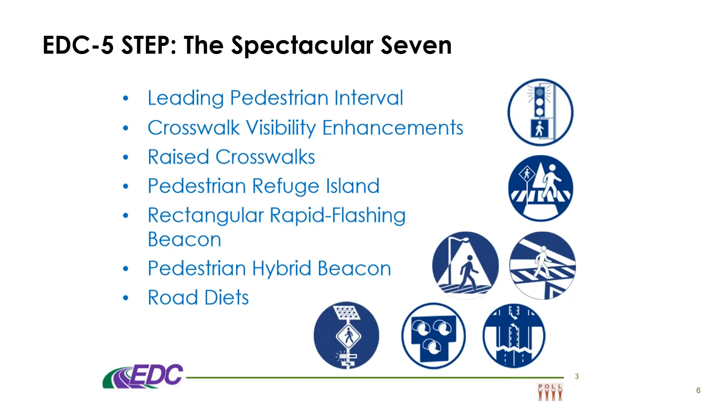The STEP guidance that I'll send you a link to shortly sends you through a step-by-step process that you can use to collect data, inventory your locations, look at crash types, select countermeasures, and deploy them and monitor their outcomes over time. It's really a good step-by-step process for any agency that's interested in improving safety at crossings, but doesn't really know where to start.

And at the core of STEP is a really helpful countermeasure selection tool that uses factors like roadway configuration, traffic volumes, and speeds to help agencies understand what are the countermeasures that we would recommend and expect to see used at these types of locations. So I'd encourage you to take a look at the STEP tables that are within the guidance that I'll link to in just a second.

I think the valuable connection here is that agencies can figure out how best to use the STEP guidance to figure out countermeasures, but what we're going to talk about today is a little bit more about how you can think about proactively looking for locations that may not have had a crash history, but may be at risk of crashes happening in the future, using these same countermeasures to address them and improve safety there.

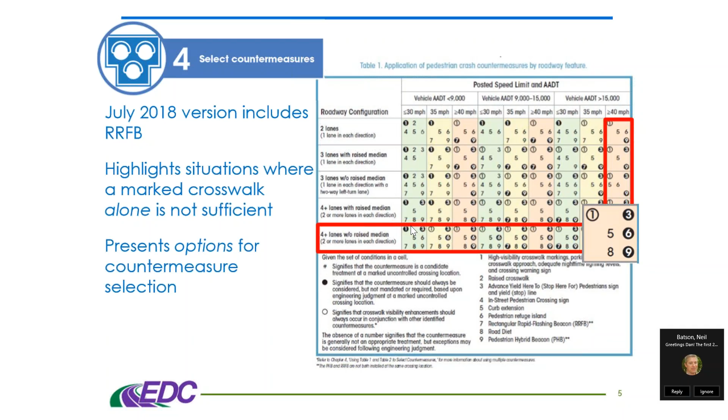Thanks, Dan. Hi, everybody. Thanks so much for being with us today to talk about this really exciting aspect of transportation safety analysis and planning: systemic safety. So I want to start today just by giving a very brief overview of systemic safety, and then we'll turn it over to the other panelists to really talk about systemic safety in practice. I'm going to pull today from a couple of major resources, and then at the end of the presentation, I'll have a listing of other resources for you.

But this is a definition of systemic safety from NCHRP 17-73. That's the guidebook on systemic pedestrian safety analysis; it's not recently released, it's about to come out. I definitely encourage you to look at that. It's an excellent resource, and I'm really excited to have some material from that today.

And then also I'll be talking a lot about FHWA's systemic project selection tool today. So systemic safety is an approach to identify high-risk roadway features correlated with specific or severe crash types. It is data-driven, really letting the data drive you to what you prioritize and what you identify as risk factors so that we can start to address the problems network-wide.

And that's a key part of this, right: it's different from site analysis in the sense that we're not just looking at specific locations as we have in the past, as we do in hotspot analysis, but we're really looking throughout the network with the idea that we want to start to address problems when they're babies, right, when they're not big problems, or hopefully before problems even occur. And to do that, we need to look throughout the network to really try to understand where the problems might occur.

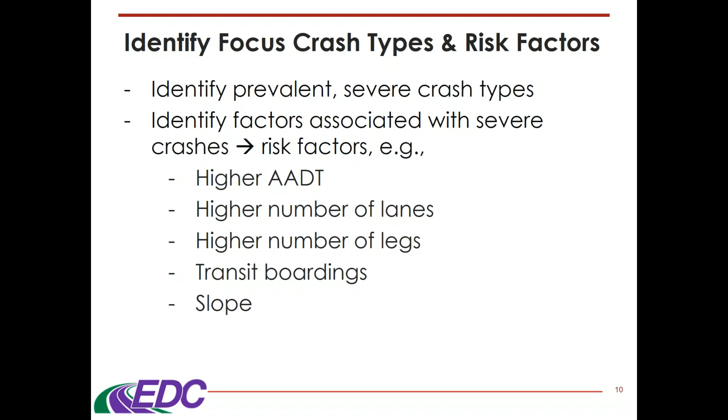So we're looking for risk factors associated with those, such as higher AADT, higher numbers of lanes and legs, places where there's a lot of activity. Transit boardings, for example, would indicate that. Also, slope can be an indicator. So I'll talk a little bit more about these things, but we're trying to understand factors we need to be prioritizing. So we need data to do that, right?

There's a recommended minimum data. There are additional data that we would recommend you collect, but we need to understand when we're looking at this, where in the system are these crashes occurring? Are we looking at the state roads? Are we looking at local roads? What are our crash types? And this is really important, again, for selecting the focus crash type.

So for pedestrians and bicyclists, oftentimes we're going to need to derive those using multiple variables from the crash data. So for example, we're looking at the motor vehicle action and the bicyclist action. So that might lead us to a crash type that is motor vehicle left turn into bicyclist going in the opposite direction, or motor vehicle driving straight into a pedestrian crossing in the crosswalk. So we need to derive those crash types to really understand where we need to focus.

We want to have an understanding of the facility type. This can be a proxy for volumes, but it's also important if you can to analyze them separate from traffic volumes. So understanding, are we talking about crashes that are occurring on the freeway, arterials, collector roads, etc. For freeways and interstates, we don't usually include those in pedestrian and bicyclist analysis, just because most of those crashes actually are occurring on more local roads, but that is not always true.

I'm working on an analysis right now with a state that has a very high percentage of pedestrian crashes, pedestrian fatalities on the interstate system. So you need to use your best judgment for your context to determine where you're going to focus. You can also, as we'll talk about in a minute, have those crashes that you're looking at on the freeway versus crashes that you're looking at on the local road system.

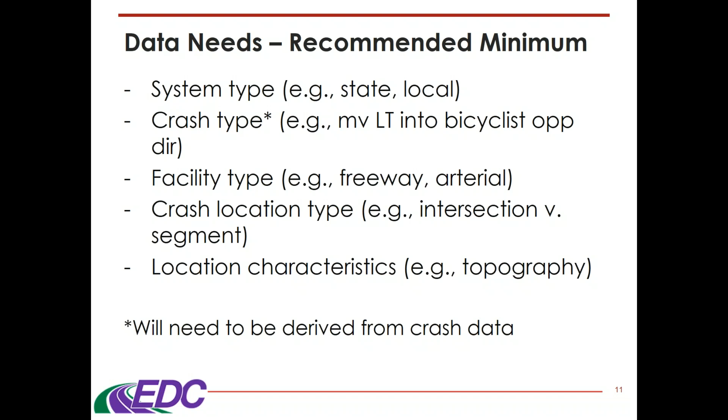We also want to have data on roadway features like number of lanes, medians, intersection features, whether or not there are traffic controls, what type of signal timing, etc. So from there, you want to select your focus crash types. So we're looking at things like which crash types did the data show to be the most severe, fatal and/or serious.

We also want to understand, are there crash types that maybe aren't the most severe, but are disproportionately severe for the number of crashes that occur. We also may want to look at the crashes that are the most prevalent. Some of this is going to be driven by the numbers that you have, your sample size, and so you may not always have the luxury of looking at just the most severe crashes. You may need to look at more crashes.

You can also look to other emphasis areas and other plans like a highway safety improvement program, but be aware of limitations and applicability. For example, those programs obviously have to be statewide, and in urban areas in particular, they may not be quite as representative of the problems that you have, specifically with regard to pedestrians and bicyclists.

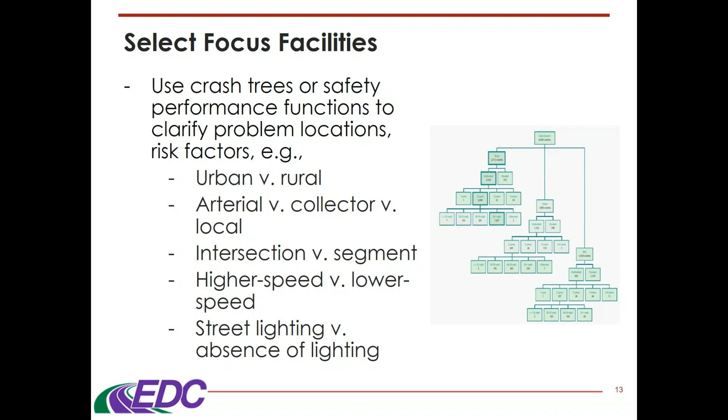So to select focus facilities, you can use crash trees to identify the problem locations. For example, you can look at things like, are we looking at more urban areas, more rural areas in terms of crash prevalence? Arterials versus collectors versus locals, dividing by intersections versus segments, higher speed versus lower speeds. This example on the right here is from New York State. They actually looked at undivided versus divided roads and number of lanes, and then they looked at speed, and you may be able to see that there are a few boxes that are outlined, suggesting that those are the combination of risk factors that they found to be really associated with crashes in a way that they want to investigate further.

So from there, we want to identify and evaluate risk factors. This is identifying characteristics common between the select crash types and the focus facility. So again, we want to focus on features more likely to be associated with severity when possible, but obviously taking your entire crash database into consideration and understanding the needs you might have for sample size as well. If needed, look to research or best practice to identify those known risk factors. I'll give some resources in a minute about this, but we have a lot of understanding that higher traffic volumes, higher traffic speeds, number of lanes, things like that tend to be associated with higher numbers of crashes. So we want to be able to take that information about risk factors to help prioritize.

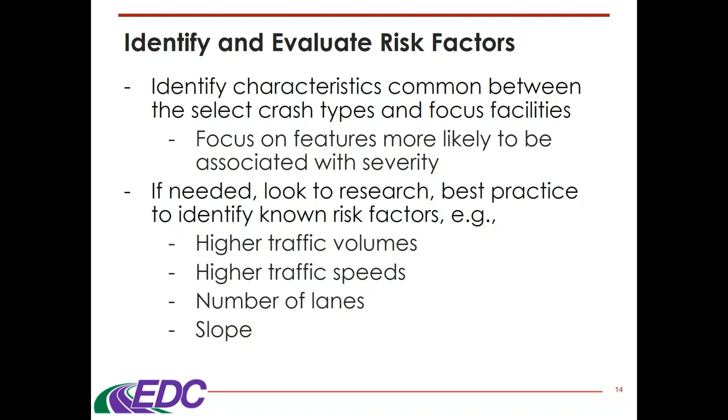And that is this next step, which is screening and prioritizing candidate locations. So once you have an understanding of your focus crash types and you have an understanding of your focus locations, you then want to screen and prioritize the candidate locations throughout the network that have those crash types or that have those combinations of factors that you've identified.

So if you don't have a safety performance function, you're going to use your crash history and your weighted risk factors to identify the priority locations. If you do have a safety performance function, and there are safety performance functions that are coming out with NCHRP 17-84 for pedestrians and bicyclists, there are safety performance functions for motor vehicles currently in the Highway Safety Manual, then you can apply those safety performance functions to your network and you can get an understanding of where crashes are predicted to occur.

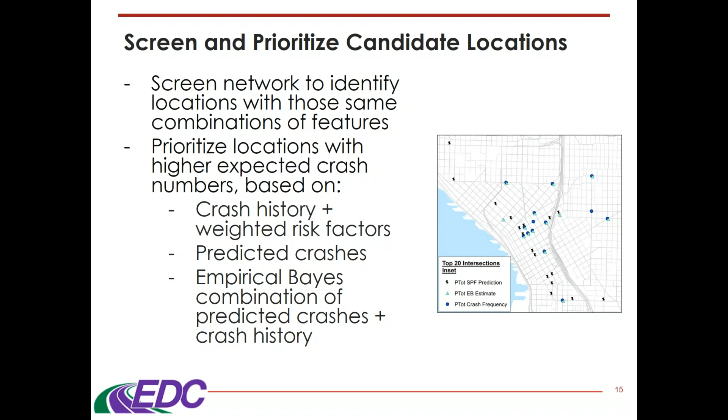And then best practice would be to use an Empirical Bayes combination of your predicted crashes and the crashes, just recognizing that safety performance functions aren't perfect, data sets are never perfect, so crash history is a valuable tool still in understanding where we would want to treat locations.

From there, we want to select countermeasures, and the idea here is that with a systemic program, we're trying to address a large number of locations that have lower crash numbers, right? So we're not replacing high collision location analysis. That is a separate thing, and oftentimes those high collision locations really do need a lot of countermeasures or a lot of revision, and so may need a lot of funding. In this case, we're trying to do a lot of locations, and so we need the funding per location to be lower. So we're looking for low cost countermeasures that we can deploy widely.

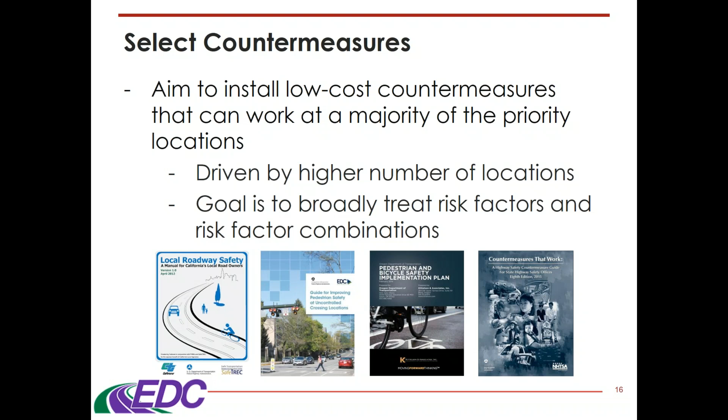And we have a lot of great countermeasure resources out there. I've just got a few little snapshots down here at the bottom, a couple from various states, a couple from FHWA or NHTSA, but I encourage you to look at state resources in your state as well, because you may have some state-specific countermeasure guidance that would be important to be aware of.

And from there, we want to prioritize our projects. So the nice thing about this is that your results can be used within other frameworks. So this is an example of how we might use prioritization within, for example, a council district. So we could say, okay, within this district, we want to prioritize these 10, or within this neighborhood, we want to do these 5 or what have you.

But we can also use this to build on other transportation plans, all of our areas and all of our efforts that we do for our pedestrian bicyclist plans or for regional transportation plans. The results from systemic safety analysis can really be used to help contextualize those plans and contextualize rankings that may already exist. And Chris is going to talk, I think, a lot more about that and how they use that in Seattle.

So from there, just with the systemic process, we want to identify funding for the program and implement it, looking at things like what are our agency goals and priorities, which funding sources exist that could support what we're trying to do here, and then how can our identified needs be built into existing efforts. Again, this is similar to the prioritization slide, that we want to, as much as we can, piggyback on other efforts that are already out there.

So if you have projects that you've identified and they happen to coincide with projects that have been identified through other plans, that is opportunity for strategy, right? So looking into the various ways that you can make those things happen, and then also understanding what funding sources exist and what might be able to be supported through those funding sources regarding what you've found to be problems in your community.

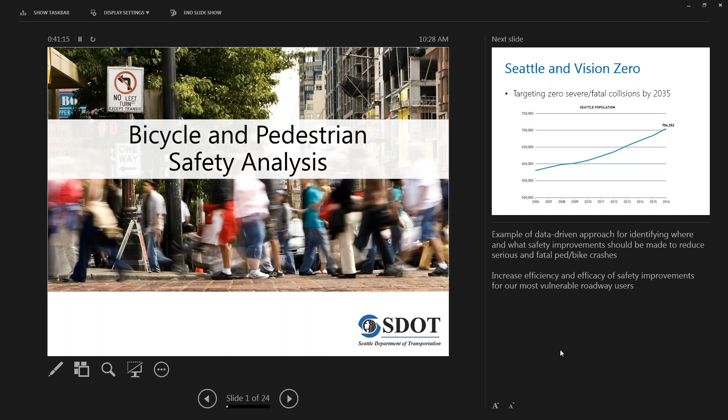All right. Thank you very much. Hi, everyone. My name's Chris Philopoulos. I work with the Seattle Department of Transportation, and I'm here to present the bicycle and pedestrian safety analysis that we published 2 years ago, which is an application of a lot of the methodologies that Rebecca just talked about.

So to give you a brief background on Seattle, Seattle is a Vision Zero city, and we are targeting 0 severe or fatal collisions by 2035. We are definitely making progress on that, but as you can see here, Seattle's population has been booming as of late. We're adding about 15 to 20,000 people per year.

Our severe and fatal collision counts are also going down, but a lot of this we can attribute to vehicle and driver safety. There's been a lot of progress made on vehicle safety, especially in the engineering side of things, and a lot of our policies in the city that have been targeting vehicle collisions. And so as of that, our vehicle severe and fatal collision counts have been drastically reduced along the same time.

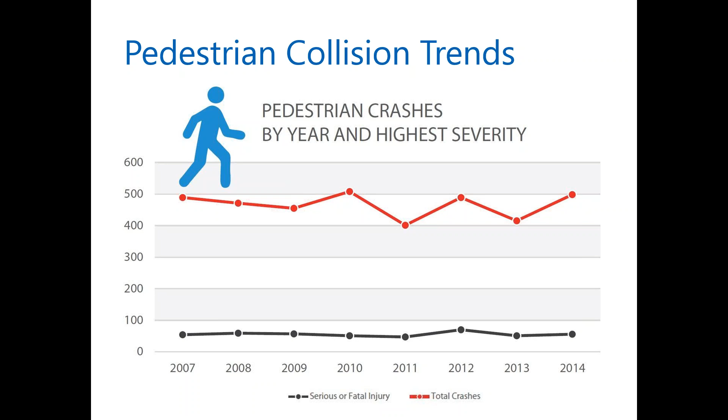But once again, as the city is booming, the rates are actually going down pretty drastically. So we've seen about a 25% reduction in pedestrian-involved collisions per 100,000 residents in the city. A lot of this is because of vast improvements to the walkability within the city, but also heavy improvements in transit usage in the city. So we see a lot more people that are choosing to walk or bike to work or wherever they're going rather than driving.

Having looked at those trends, we started looking at how these collision patterns actually interact with our road network as a whole. And the main takeaway from this is that we see about 75% of our bike collisions and 80% of our pedestrian collisions are happening on arterial streets.

So it guides us to see that even though we can see severe or fatal collisions not on our arterial streets, it behooves us to spend a little bit more of our analysis looking at the actual larger arterials where we would expect that higher vehicle volumes, higher vehicle speeds, more conflict points might lead us into higher collision counts, but also higher severity of those collisions.

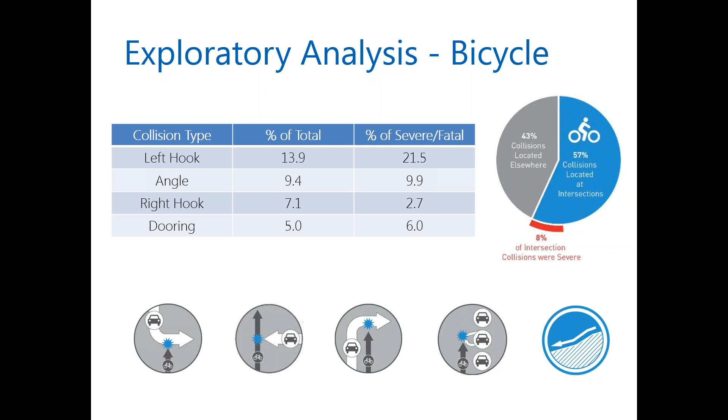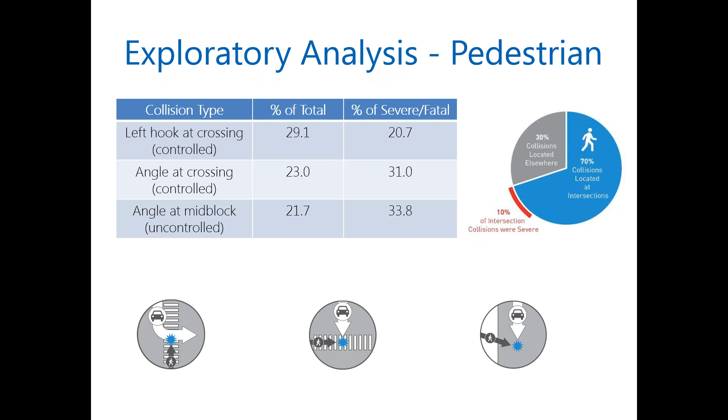This is something that we've seen very prevalently. That's about a fifth of all of our total collisions, but they're very random and hard to predict. As such, they accounted for a third of our severe and fatal collisions at this time. And on the right, you can see that 70% of our pedestrian collisions were occurring at intersections and 30% are either in driveways and mid-block, which drew us to look at exactly where in the street network we're seeing these types of collisions.

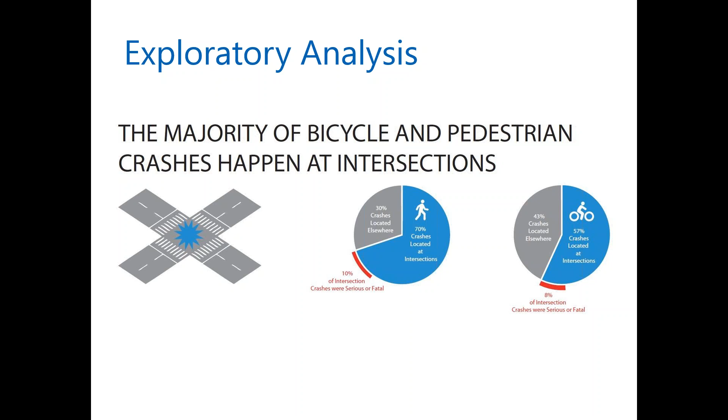Even though only a little over half of our bicycle collisions are occurring at intersections, 70% of our pedestrian collisions are occurring at intersections. Part of that's to be expected because the road network is designed to funnel people, especially pedestrians, to intersections for crossing purposes, but it also speaks to the amount of exposure that's occurring at those locations.

Furthermore, if we looked at whether an intersection was signalized or not, we saw that a signalized intersection is actually less prevalent for bicycles to be struck, and on top of that, the severity of those collisions drops from the 12% average severe fatal rate to 7%, whereas with pedestrians, when they are at a traffic signal, they have a 2/3 chance of being struck there versus at an unsignalized intersection, and also the severity of those collisions goes up.

So rather than assuming that intersections were the problem here, we decided that we also needed to take exposure into account. And so exposure is just the level of pedestrian or bicycle activity at a given area. For the first round of the BPSA, we wanted to create our own sort of trip generation based exposure model for pedestrians and bicycles. For pedestrians, we used what annualized count data we had available, and then we also had a trip generation model to supplement that. But at the time, we had a very limited amount of bicycle volume or pedestrian volume and counts throughout the city.

Whereas with bicycles, we did use the annualized count data and the trip generation modeling, but we also used Strava, which is an opt-in GPS tracking app that bicyclists can use. That data was available to us to see where bicyclists who were opting in were riding in the city. And along with that, we also have our GIS geospatial bicycle network that tells us where bike lanes are, so we can predict which locations bicyclists would probably prefer to be using.

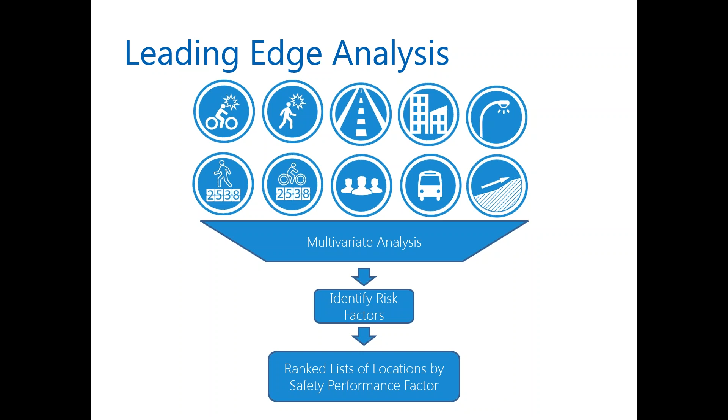So based on our first exploratory analysis and the results of that multivariate analysis, we agreed that we wanted to focus our model on intersection locations as they account for the majority of our collisions and are overstating for severe and fatal rates for pedestrians. We found that mid-block collisions were, like I said, a little bit more random for bicycles and pedestrians, but on top of that, there's a bit more order to how intersections operate based on the design itself. So we wanted to focus on that for our first run.

We also decided to prioritize 5 collision types that we were interested in. The first 2 are just any bicycle and pedestrian collision available. Along with that, we wanted to look at the top 2 bicycle collision types by total share and also the severe and fatal rates, which would be the opposite direction bicycle collisions, usually left hooks, and the right angle bicycle collisions. And then our 5th model type would be the right angle pedestrian collisions. That is regardless of controls.

We found that of our 15,500 intersections, signalized intersections were not enough on their own to be their own data set. So we decided that we would just evaluate every intersection in the city based on that collision type to see how the SPFs pull out.

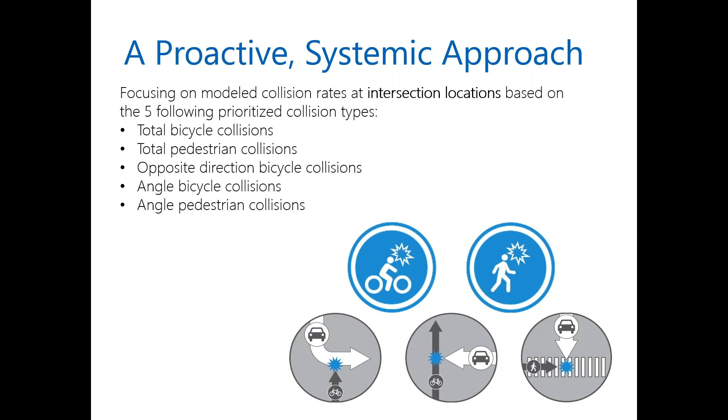So after having run that, how are we using these findings? The first thing we're doing is identifying the locations where street or signal design changes may be needed. This is not a reactive approach, I would say, but it is data-driven. So based on the results of the first round of SPF models, we can say that there are certain roadway designs that contribute so heavily to bicycle and pedestrian collision patterns that we would like to prioritize those design changes over other things. Along with that, when we do make these decisions, we want to prioritize where we can get the most cost-effective improvements at locations in order to mitigate not only existing but also potential future crashes.

So we have effectively wrapped the BPSA's analysis into all of our Vision Zero programs, where if a project is going through an area that the BPSA calls out based on the safety performance factor outputs, it can suggest either improvements or at least a minimum standard of design to take bicycle and pedestrian safety into account that might go beyond what is warranted by, say, the MUTCD design guidelines.

In talking about the data, we've had a lot of municipalities reach out to us and talk about how they can do this type of analysis on their own, and we've always looped back to the idea that having good data is probably the #1 resource that you need. Thankfully, Seattle has a fatal collision rate that is incredibly low. It's one of the safest cities in the country, at least for a city our size. We have the same fatality rate per capita that Sweden does, or New York, although they have many, many more people available to them.

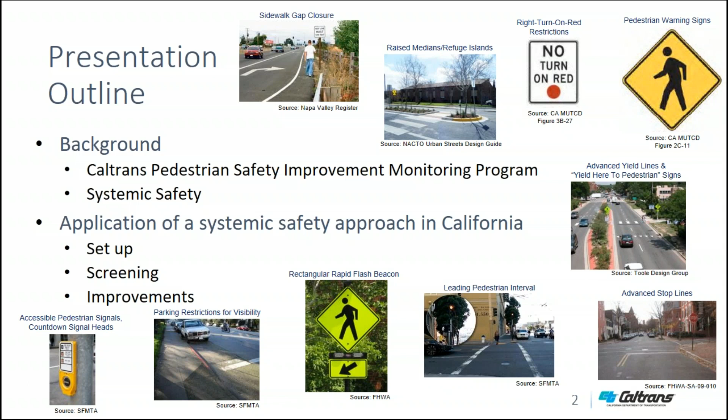We required status updates on the 129 investigations in order to ensure that our district traffic safety staff was progressing along on their investigations. All the investigations were completed in March of 2017.

Next slide. We also required our traffic safety staff to take pedestrian safety trainings to ensure that they had the needed knowledge to perform their investigations. They learned effective solutions and best practices in the design and operation of pedestrian safety.

Moving on. One more slide, or one more click. We had 2 pedestrian safety trainings, one in Sacramento and one in the Bay Area. And we're planning to provide 3 future trainings at this point as we work to expand our pedestrian safety program. Next slide.

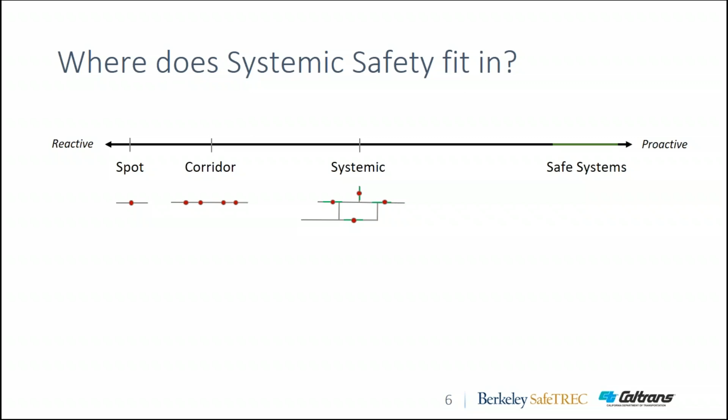When we move further towards the middle, similar to what Rebecca described and Chris talked about, with systemic safety we're identifying locations that suffer from a specific type of crash. It no longer needs to be spatially within a corridor or a specific spot. It's more specific facility attributes, or attributes of a location, in combination with a specific crash type.

So we're placing systemic somewhere in the middle between reactive and proactive, because it uses historical crash data to identify priorities. So it's reactive to things that have happened, but it allows us to make improvements also at many locations that either have a low crash frequency or crash rate, or even no crashes at all.

So we are using historical data to make improvements that are targeting a specific type of crash at locations that we know have a sensitivity or are suffering from that type of crash. And that's where we're placing it, somewhere in the middle on this continuum.

When we move all the way to the right, we have more aspirational approaches like Vision Zero or Safe Systems, and they are as proactive as it gets, because the underlying goal there is to build a system on which no one can be severely or fatally injured, and that's always the effort and that's always the desire. And it's very proactive in that sense, because you need to keep on continuing to do that even when you get to 0 deaths.

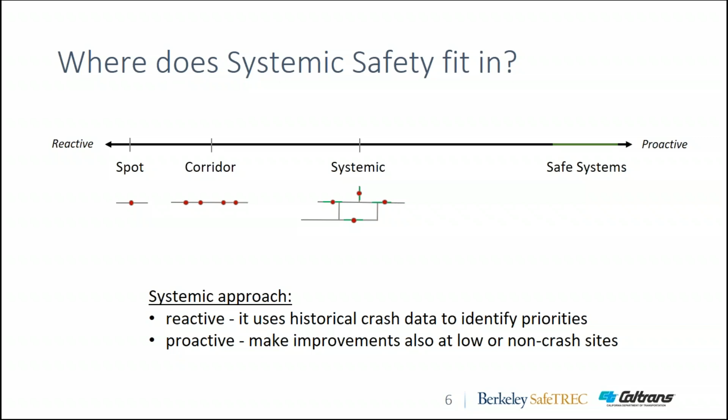So our approach is very similar to FHWA systemic safety program, and similar to what Rebecca described. So we're showing here again the different elements, and more specifically, the tasks that are under element 1. The first task being selecting the focus crash types, and task 2, the focus facilities. And what we wanted to do, we wanted to use these principles, but to do it in a maybe slightly different sequence. So instead of doing it as 2 sequential tasks, we're doing it simultaneously.

So we're generating a matrix where the different rows represent different crash types, similar to what we would have in task 1 of FHWA's tool. So it can be a pedestrian crossing in a crosswalk in combination with a failure to yield, or the different crash types even that Chris described, if you have that level of detail in your data.

And then the columns, similar to task 2 of FHWA's approach, represent the facility types, so the location types. And again, the type of variables that you can use to describe that are similar to what Rebecca and Chris talked about. So it can be the control of the intersection, it can be the number of lanes, it can be some information about ADT, and so on.

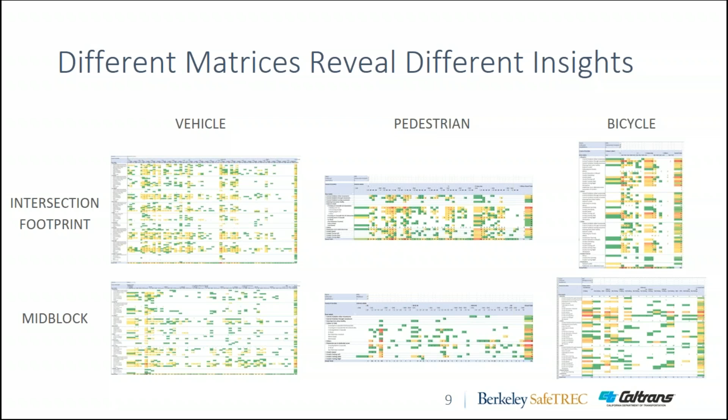So moving on to talking about the process, or how to set up such a systemic approach. And again, our underlying goal was to come up with something that can be used as a framework to identify systemic priorities for Caltrans at the district level or at some other resolution. So we wanted something that's scalable, but also consistent and can be done at a certain frequency, every 2 years, every 3 years, as desired.

So the setup includes 2 steps. The first one is to define the structure of the matrix. In other words, it just means picking the rows and the columns. And then the second step is to start priming some of the potential countermeasures that would apply for a specific cell of the matrix.

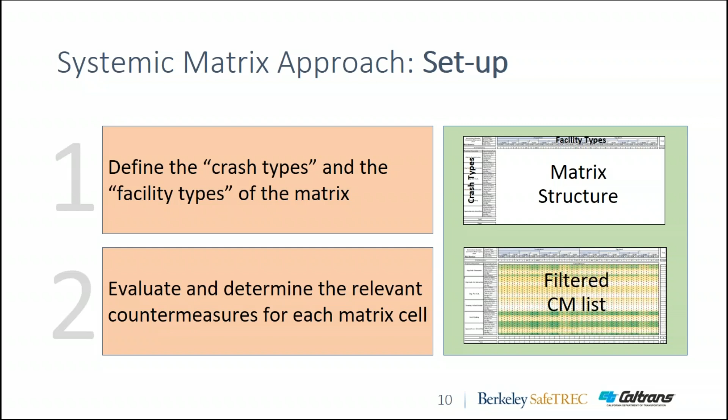So when we're talking about the structure of the matrix, the first thing that we need to do is to determine what are the matrices of interest. As I showed in that example from that local agency, you can have it across different modes. You can have it for intersections or highway segments. You can break it down by rural, urban, maybe even a level of severity of the crash.

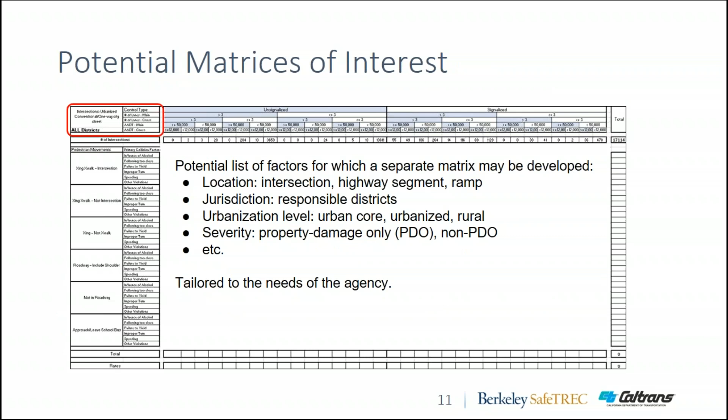And what we're showing here is that, again, this approach can be applied for these different types of matrices, and in collaboration with the agency, it can be tailored to the needs, and it is of course limited by the data that's available. So in this specific presentation, we'll be focusing much more on an intersection matrix that was developed for the California State Highway System, and the process to determine the rows and columns is based on several things.

It's more of an iterative process where you use all of the detail that you have about the crash type. In this case, we use pedestrian movement in combination with a primary collision factor together to define what is the crash type. And again, it was an iterative process to narrow down what combinations it would have. But in addition to the expert-based process, there are also some performance measures that we're using to make sure that the matrix has some efficiency to it in terms of blank cells and some other attributes.

And similarly for the columns, again, we're limited by the data that's available, and we're exploring different combinations of control, number of lanes, ADT, and some other attributes until the combination of rows and columns generates a matrix that's agreeable to the agency and the researcher.

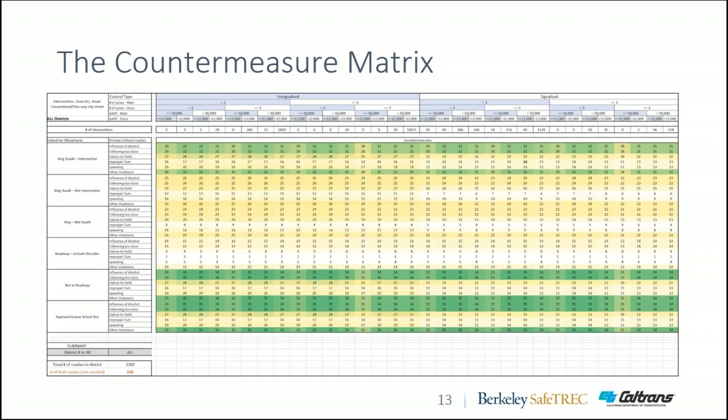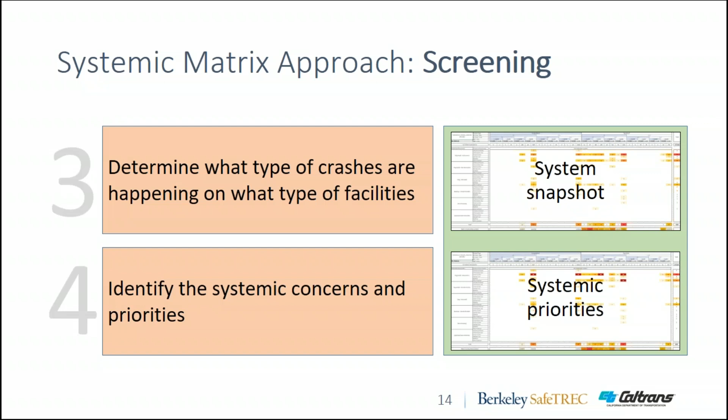The second phase is screening. So after we have the basic structure of the matrix and we know the countermeasures that apply, we need to determine what types of crashes are happening on what types of facilities to give us this systemic snapshot, followed by a technique to identify the systemic concerns and priorities that will then be passed on to the district practitioners to consider for investigations.

So when we're populating the crash matrix, in this case, this is a matrix for intersections, given the rows and the columns that we looked at before. And you can immediately see that you have here some sort of story, some sort of picture regarding what type of crashes are happening on what type of facilities. And it's hard to put this on a slide so that people can actually see the full picture, but also read it.

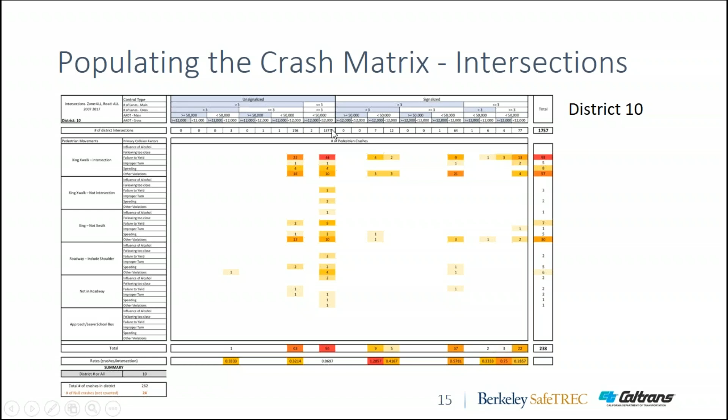If we look at a different district, District 10, that's more rural, so suddenly the systemic priority or the systemic concern is now much more on the unsignalized side, and it's also for intersections that have a lower laneage, so more narrow intersections with lower ADT, which is what is expected for these type of districts.

So after we generated these snapshots, and again, that was just for intersections, then the next step is to decide from these, where do you do the cutoff? What from these cells are the cells that you want to focus on? And we're not going to go into much detail how it's done here, but as always, there is this trade-off between a more inclusive approach that you want to cover multiple concerns within your network versus a more restrictive approach. You say, hey, we want to focus on something very specific, or we want to allocate our resources just for the top concern.

I do want to add another comment regarding non-engineering countermeasures. So here we're very focused, and the application is for design improvements, but the same structure and the same approach under various circumstances can also be used to identify non-engineering improvements that can apply for that specific crash type. In this example, a failure to yield for a specific type of facility.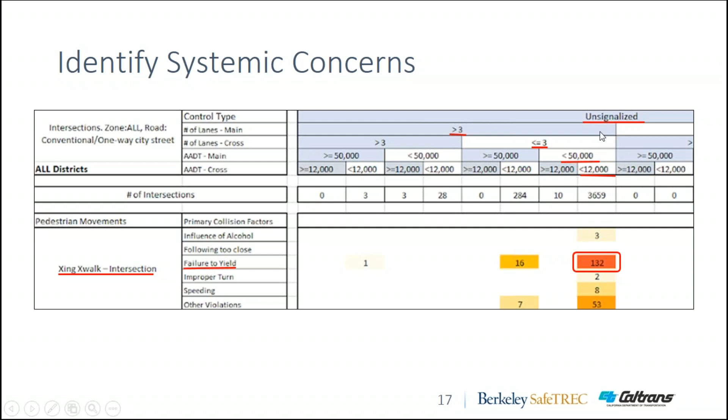So following up on how to actually identify these systemic concerns, we're applying some statistics on the data, and then we're able to pinpoint and say this is one of several systemic concerns that then are being passed on to the practitioners for consideration or for further investigation regarding all of the facilities that have these attributes: unsignalized, certain number and certain combination of laneage and ADT.

And now I'm going to pass it on to Rod to talk more about what are the steps that they are developing and that they have developed for the district to then use this preliminary list to refine it to a more specific list of locations that are a higher priority, and then how to use that to come up with potential countermeasures.

Great, thank you, Ofer. As Rachel mentioned at the beginning, and as Ofer was mentioning, our task here is to take the output of these tools and then identify specific actions for the Caltrans district safety investigators to take to reduce the probability of these collisions and improve pedestrian safety.

The systemic tool that Ofer showed groups the collisions by these various characteristics and highlights those with the highest number of collisions. We then use the output of the tool to create a list of locations on the Caltrans highway network that have similar characteristics. And those locations are prioritized for further analysis. And we do that both for the highway network as a whole and looking at it by district. Go on to the next slide.

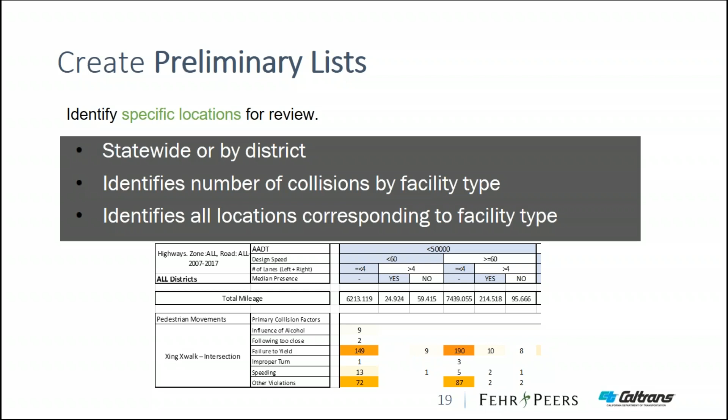So after we've got these locations identified, we can then look at other factors to determine what should be prioritized. A key part of this is going to be applying some of the other work that Caltrans and SafeTREC have done to estimate pedestrian exposure at different locations across the state highway network. But we'll also pull in other factors to identify these priorities.

These factors may range from proximity to schools, especially those with high percentages of students with free or reduced price meals. That's a factor that we use in California to identify disadvantaged community populations. It may include other indicators of disadvantaged communities, such as income below the state median. It could also include things like CalEnviroScreen.

This is a tool used in California that pulls in various indicators of pollution burden and other population characteristics that are associated with vulnerability to pollution's health effects. And that's another measure that's used, especially within the California Active Transportation Program, to identify different disadvantaged communities.

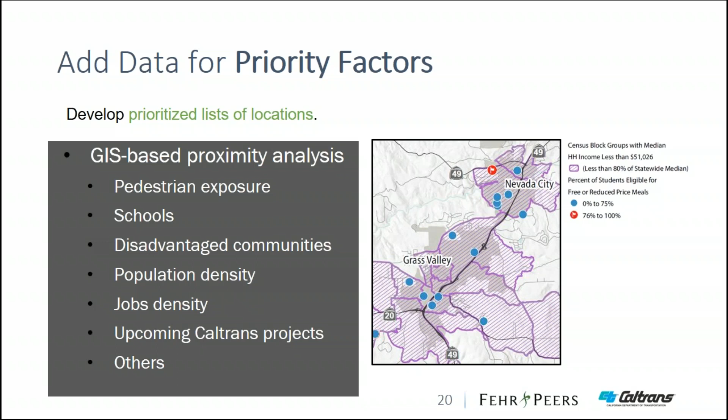Another thing that we may look at is the areas where Caltrans has planned existing projects. So by getting out in front, by leveraging work that's already planned to be invested in these locations, we can identify specific improvements that can be made as part of the ongoing work that's planned on the state highway system. So we'll work to identify and prioritize these locations with the input of Caltrans and the various district safety investigators. You go on to the next slide.

So we won't just give them locations. As Ofer showed in the tool, he has developed some specific guidance that is tying countermeasures to the different crash characteristics. So we'll take the output of that, identify those remedies for each location, and provide the safety investigators a toolbox of how to apply those. For each location, they'll get this prioritized list of locations and the specific countermeasures that go with that location.

It's important to note though, that this is not a recipe that can be then directly applied. It'll be important to have the safety investigators look at each location specifically, look at the unique characteristics of that, and apply the specific countermeasures that are most appropriate and that can be best applied in each location. It's important to have that specific engineering judgment and knowledge that goes into determining the remedies for each location to make sure that the best solution is made.

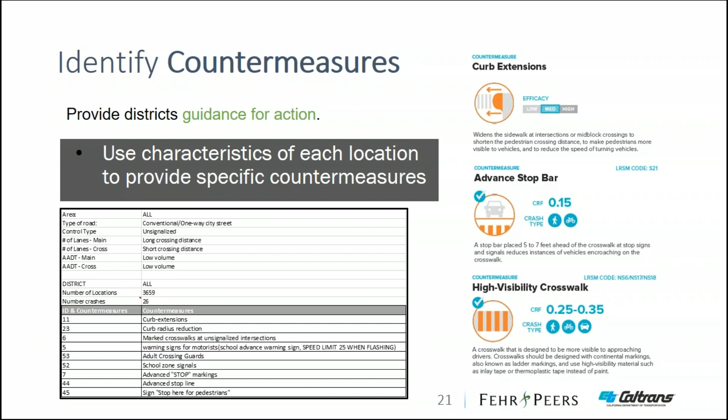And we're going to be providing each of the district safety investigators training so that they can apply these things appropriately. And with that, I'll wrap it up and hand it back to Dan.

Great, thanks so much. I appreciate all those presentations, a couple of really interesting examples from different sort of contexts and different settings depending on where people are coming from. I've got a slide that I'd like to put up now to help guide our discussion period, and we are going to get as many of these questions in as we can. Let me get the right slide up.